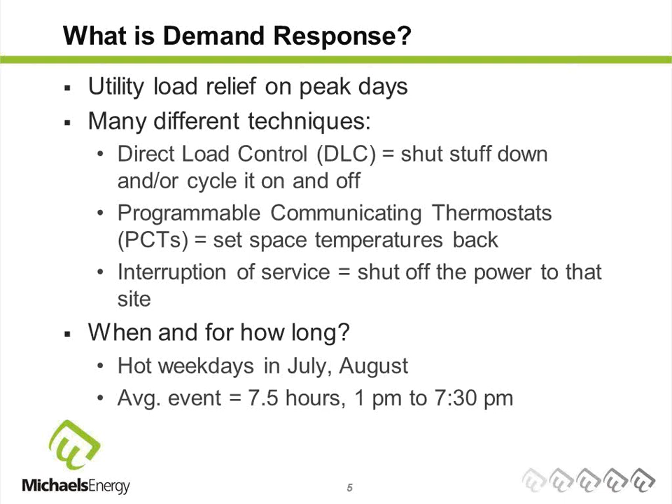So when and for how long? Most commonly it's hot weekdays in summertime, July, August, when cooling loads are at their highest. And we found from our research that the average demand response event lasts about 7.5 hours, and a rough time frame is 1 p.m. to 7:30 p.m. Late afternoon to early evening hours are the most common.

So that's another definition of snapback. But none of these are the ones, of course, we're talking about today. We're more interested in energy than hats. And so we're talking about after a demand response event, if you change the set points in the building, they all come back to their normal set points.

Air conditioning comes back on 100% power to try to catch up now that it's had all that time where it's not been able to maintain space temperature. And then all the interruptions cease and things resume to normal operation. So immediately after the demand response event, your demand jumps way up. And it jumps up higher than what it would have been had you not done the demand response at all. So that's what snapback is.

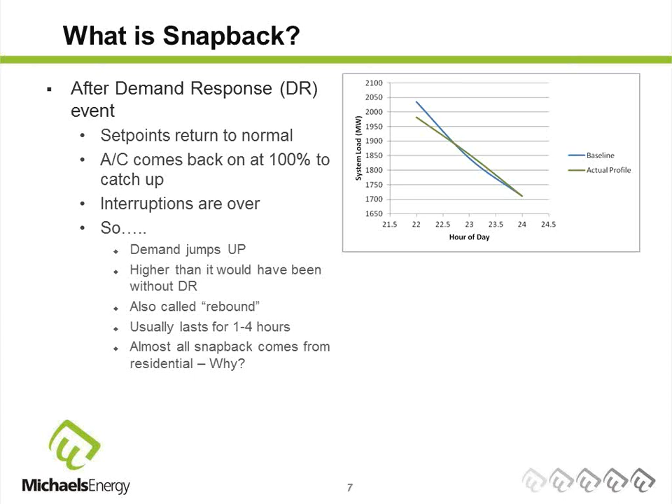First, before we get to that graph, this one here shows the system load after an event. So this is from our data showing the last few hours of the day, hour 22 through 24. And the blue line is what it would have been had you not done demand response, and the green line is what it actually was with demand response. And as you can see, it's kind of hard to see, but the green line does pass over the blue line, and that region right there is the snapback.

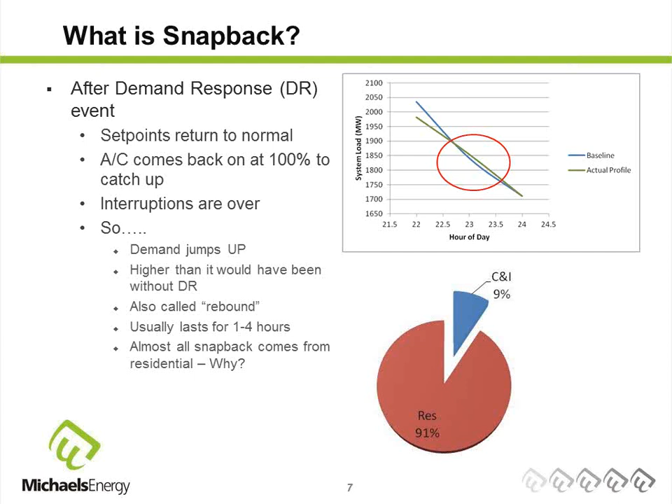And then here's the graph showing the breakdown between residential and commercial, industrial. Obviously, most of the snapback, 91%, comes from residential. And the question, of course, is why does that happen? In order to address that question, we wanted to look at the residential sector a little bit more carefully. And we'll get into the details of how we did that, but first a little bit about what they do at the residential side for demand response.

One way that's common is to use air conditioner electric heat cycling. That's where you do 15 minutes on, 15 minutes off, typically, during an event. Then you have domestic hot water curtailment. That's where you just simply turn off somebody's water heater during an event and use thermal storage built up in the water tank to allow the customer to continue to have hot water while saving the energy of the heater.

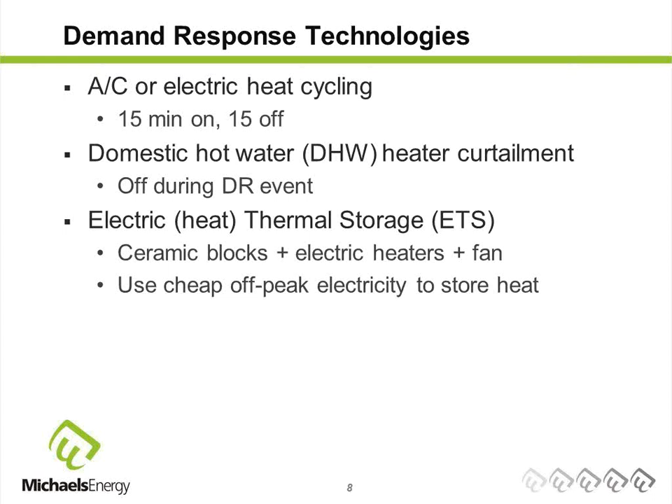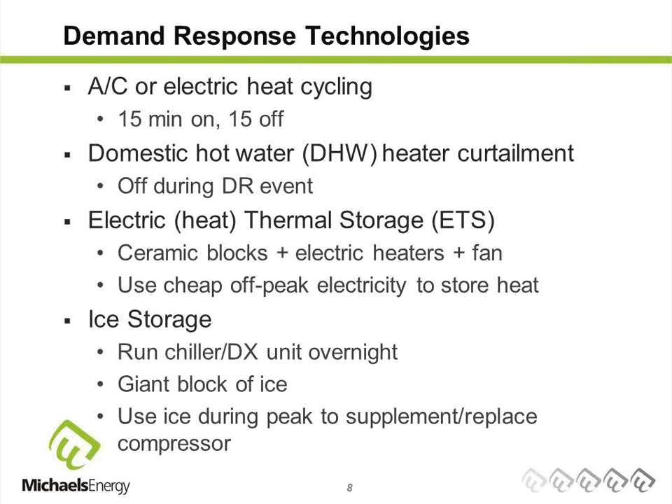Then you have electric thermal storage using ceramic blocks with electric heaters in them and fans. This stores up off-peak electricity to use as heat the next day during the peak. And then ice storage, where you run your chiller or your direct expansion unit overnight and store up a giant block of ice, basically. And then during the day, you run refrigerant through that ice block and use that to supplement or replace the compressor during those peak hours.

So these different things, demand, energy, snapback, demand response, how do they relate to each other? And how can we quantify that? Well, first of all, demand response saves demand. That's its primary purpose. And the large utility that we studied in 2007 saved 454 megawatts of peak power by doing demand response.

It also reduces the utility operating costs because of the high cost of electricity on peak and the high cost of generating electricity on peak. You save money for the utility. And going along with that, of course, the generating efficiency increases as you reduce your peak generator operation, since they're the lowest efficiency generally. And it causes snapback in residential customers primarily.

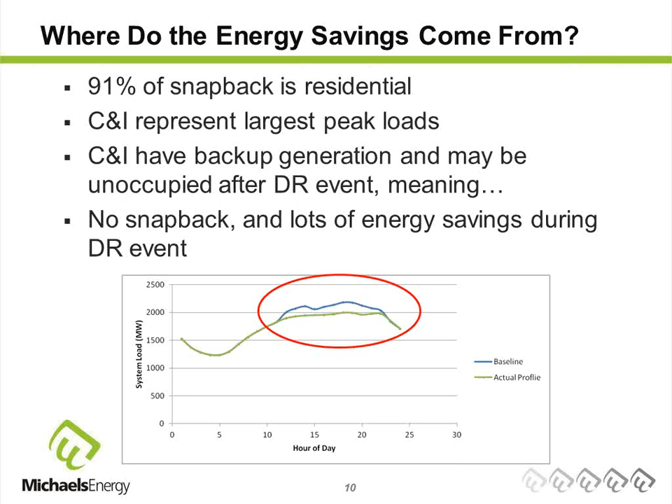And there's an example showing a typical demand response day for one utility, baseline load, what it would have been without it. The green is the actual with demand response, and all that area in between the two curves, that's savings. And actually, you can't see it because it's really small, and I zoomed in on the slide earlier, but the snapback shows up just a little bit at the very tail end of that.

So before we started our own research, we looked at what was out there as far as quantifying snapback and demand response energy savings. So there's a few studies out there. Some of them did better jobs than others of looking at snapback and quantifying.

And so, California did a few studies, but I was underwhelmed with the results, particularly because they had graphs that would show snapback in their appendix, but they didn't address those results anywhere in the report. So they didn't seem to think snapback and the energy impacts were important to them. They were more concerned with demand reduction, which is certainly understandable.

But in these studies, a few of them quantified snapback, but generally that was not the focus of the research, and it certainly seems like there was a lack of research out there to compare to. Certainly in some of the other technologies that we will look at here later, hardly anyone has looked into it. So these are the largest studies that we compared to.

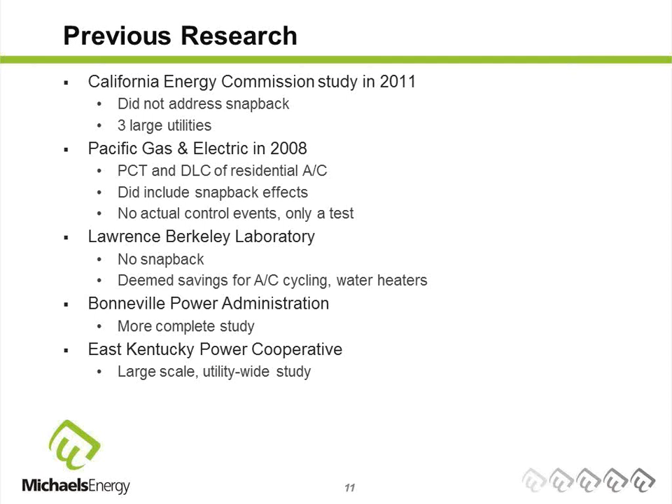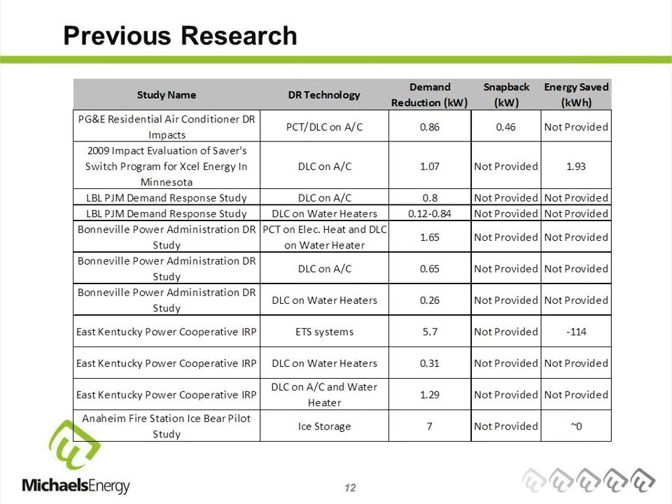One study did electric thermal storage, and most of them did not look at snapback, quantify it at least, as you can see in this column. And most of them didn't look at energy savings. There's only a couple that actually did quantify the energy savings of these different demand response technologies. So there's clearly some information lacking, and we wanted to try to fill the gap.

And so for the DER study we did calculate the snapback and the net energy savings for demand response. We looked at two different utilities. One was a large investor-owned utility, and the other one was a generation transmission co-op. We looked at their system-wide load profiles on those demand response days, the baseline curve, which would have been what they would have done without demand response, and then the curve with demand response. And we looked at these 5 individual demand response technologies, and we wanted to analyze those each in detail at the individual home level.

So we looked at 2 different utilities, like I said. These utilities were pretty different. They had different generator mixes, different mixes of customers, residential versus C&I, different numbers of customers. So the two utilities were separated for analysis purposes. Our data had 8 demand response events from the IOU and 21 from the cooperative. Why was there such a difference?

That's a really good question. Well, one reason was they're different years, so the weather was different between the 2 years. One was 2007, one was 2011. So why didn't you use the same year? Unfortunately, that's the data we had available to us. And because we were able to keep them separate, we were looking at them as separate entities, not so much interested in comparing the two.

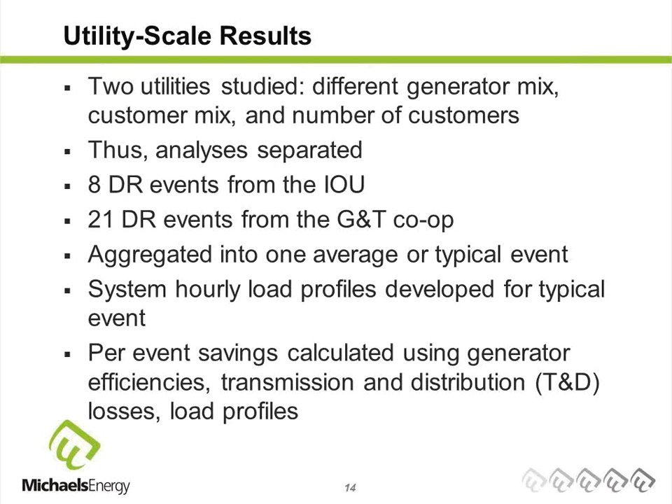The co-op was large enough that it actually still had enough suburban or city customers and industrial customers to drive that up. So we aggregated all the events from that year into one average or typical event for that year. And we developed system hourly load profiles for that typical event. And then we calculated the per event savings using the generator efficiencies, distribution losses, and load profiles for each of the utilities. And you'll see that here.

So these are our final results for our utility scale analysis for the 2 utilities we looked at. And you can see the load relief, the source savings, and then these 2 here, the 3rd and 4th rows in the table, are normalized by the megawatts of customers enrolled in that demand response program. That was in order to normalize it to make it more useful more generally. And so those are the normalized values for these 2 different utilities and the net energy saved for each. This is for that typical event.

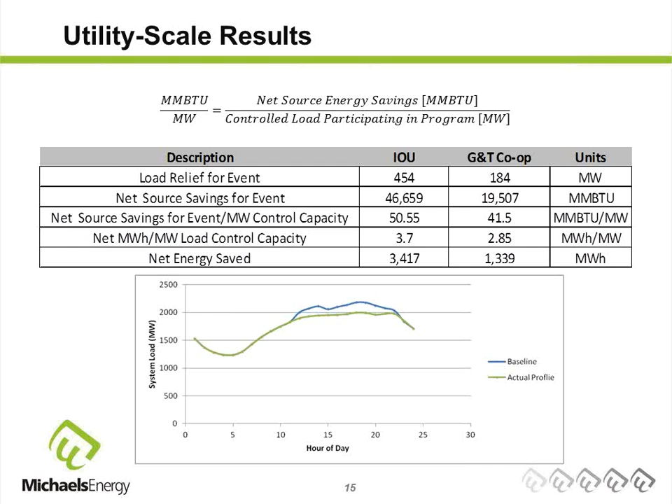So next up, I'm going to discuss a little bit how we did energy modeling to look at the energy savings at an individual home level from these different demand response technologies. How do homes and home air conditioners and home water heaters interact with demand response events? So we took a typical Minnesota house. We used census data along with energy codes to define what a typical house is. We also utilized a previous project we had done for DER on geothermal, and we utilized that same model house with just a little bit of updating.

And we used Energy Plus and BE-Opt to do the actual modeling. Energy Plus did all the energy analysis. BE-Opt is just software designed for residential modeling, and it makes inputting residential parameters and designs much easier than Energy Plus by itself. So it works with Energy Plus. And we used that to simulate demand response events on peak summer and winter days.

And we did 3 different home sizes. We were comparing the no demand response demand and energy versus demand response demand and energy the same day, the same hours. We did 3 different sizes: a small house, a median house, and I use median there because that's from the census data, what the median house for the Twin Cities metro area was, and a large house. Do you know what the definition of that was? I have it in here, I believe, coming up. Yeah.

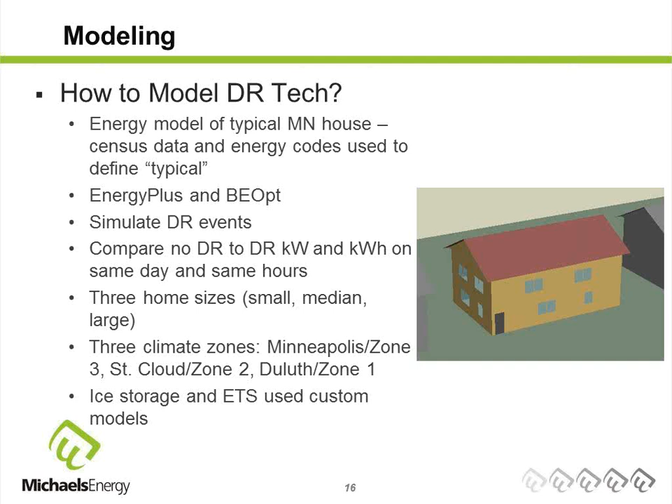And 3 climate zones. These are the 3 climate zones defined by DER for the state. So we have Minneapolis representing Zone 3, St. Cloud for Zone 2, and Duluth for Zone 1. And then we had to develop custom models for the ice storage and electric thermal storage because those could not be incorporated in any of the energy simulation models. And so we developed spreadsheet models to analyze those.

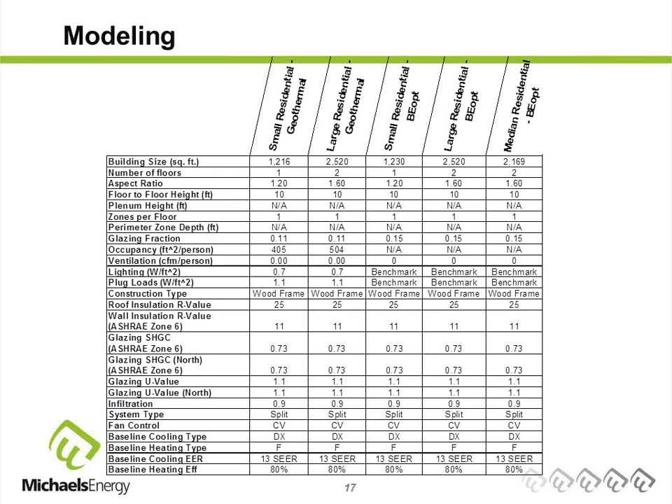This is, once again, a really big table, but if you want to read the report, you can look at these in more detail. These are from the old geothermal study, the first 2 columns. And we adapted the large and small house from those to use for this project, and then we added the median house over here. So there's your 2169 square feet, 2-story, and other things like that. So that's where we got all the parameters, the windows, the insulation, etc., for the energy modeling.

And these are the results from that research. As you can see, we get savings for everything. The only thing, thermal storage does not really produce energy savings, because with electric heating, whether you do it off peak or on peak, or when it's cold or warm, the efficiency does not change. Unlike cooling, where if you do it at night when it's cooler to store up, like with ice storage, the efficiency of the compressor is higher at night. That is not true with electric thermal storage, so you don't get any energy savings, but you do still get that peak demand savings. You're just trading off electric heat one time of day for another. But these other ones do.

It varies in degrees. This is for the Twin Cities, with that weather data. And I circled these first two here because I wanted to characterize the snapback, obviously. So I included that here, but this is the net. So this includes that loss. You lose some of the energy you save during the demand response event with the snapback after the event. So this takes that into account with the net values here. And this is per event, per house.

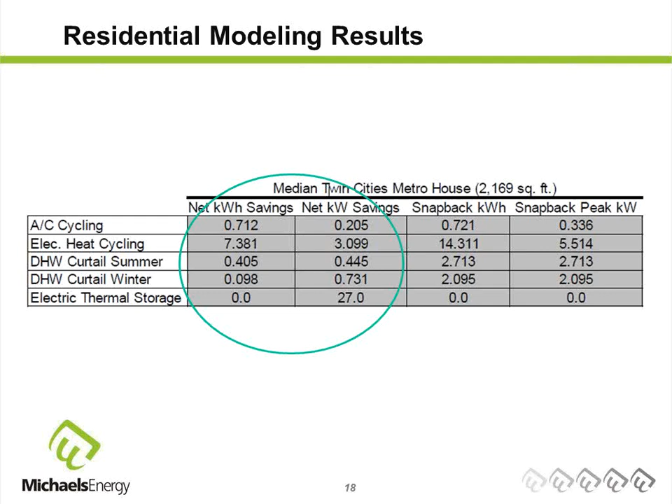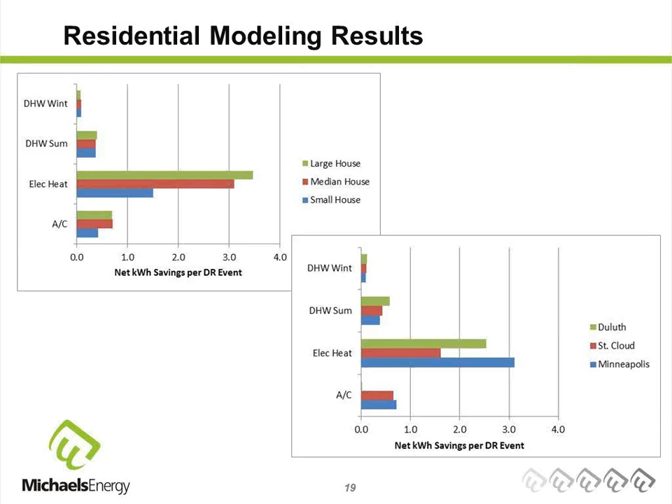So let's see. Next, I want to talk about the ice storage. The way these work, we looked at what are called Ice Bear units. This company called Ice Energy makes these. And they come in 5-ton increments, and you can attach them to an existing direct expansion rooftop unit. And basically it has its own compressor and its own storage compartment for ice. And then it has refrigerant lines that connect to an evaporator that you install into the existing rooftop unit.

And then it allows you to exchange refrigerant between the ice storage and your main rooftop unit, and allows you to get that cooling by storing it up at night, and then during the peak afternoon, the ice storage unit kicks in and does all the cooling for you and relieves the strain on your rooftop unit.

And so to model this, we wanted to look at a variety of typical small commercial buildings. So we looked at everything 2,000 to 8,000 square feet. We sized the units accordingly in 5-ton increments because that's the way these units are manufactured. So we did 5-ton, 10-ton, and 20-ton cooling loads. And we did the different schedules because we wanted to see the effect that building schedule would have with setback and everything. So we did 4 different building schedules for those sizes of building to represent 4 different uses: retail, a 24/7 operation, those sorts of things.

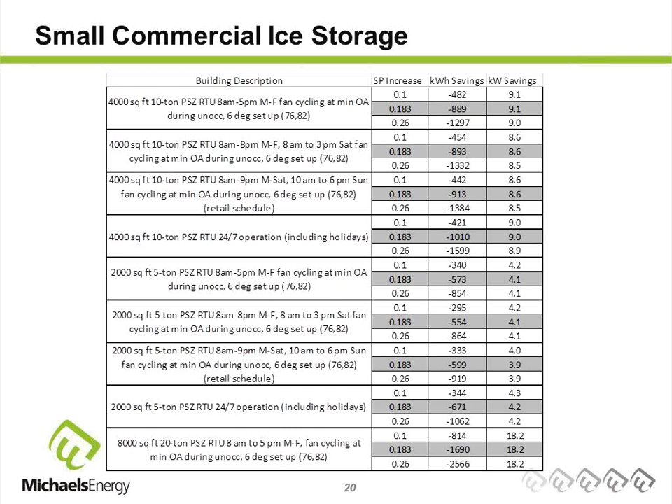And so here's the trends we ended up with. After running all those simulations, we found that the peak demand savings varies linearly very well with the cooling capacity in tons. And so we were able to develop a nice little profile for this range of cooling from 5 to 20 anyway. That worked out really well. The peak demand savings correlated well.

And then when we looked at the energy savings, which is actually an energy penalty because it increases the energy use overall, we had to do a three-dimensional fit because there were two parameters that it ended up being dependent on. It was dependent on the tons and the hours of operation schedule, which makes sense, that the energy use should be dependent on both those factors. And so we did a three-dimensional fit for that to develop an equation that would relate those two parameters to the energy savings.

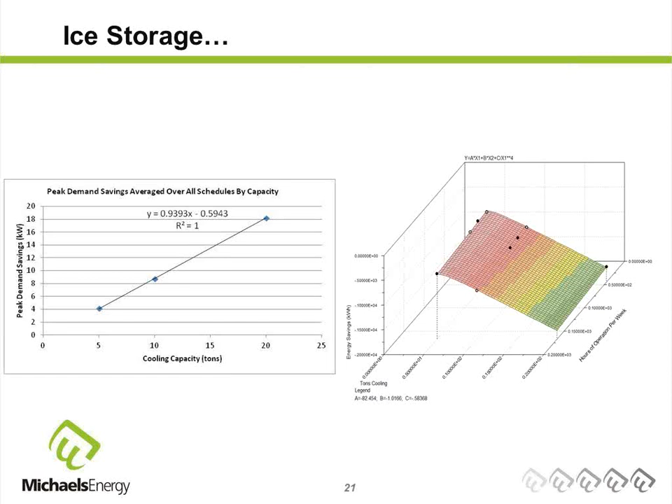And this is how we actually went about doing it. We used eQuest software to develop our cooling loads. So that's how we determined what the cooling loads in the building were for every hour of the year. Then we used the manufacturer data provided by Ice Energy to get the ice charge times, how long it takes to store up the block of ice that you need to meet that day's loads during that peak time of day. And then we used Ice Energy's compressor curves to get the compressor demand, and we calculated the charge hours per day, and then developed the correlations that I discussed.

And as I said before, the energy increases because of the fan energy penalty. So these are the two equations that we developed based on this research. And as you can see, obviously, because it's a three-dimensional fit, two parameters, it's a little more complicated of a formula, but nonetheless, you get your energy penalty from that formula by inputting your hours of operation per week and then your tonnage.

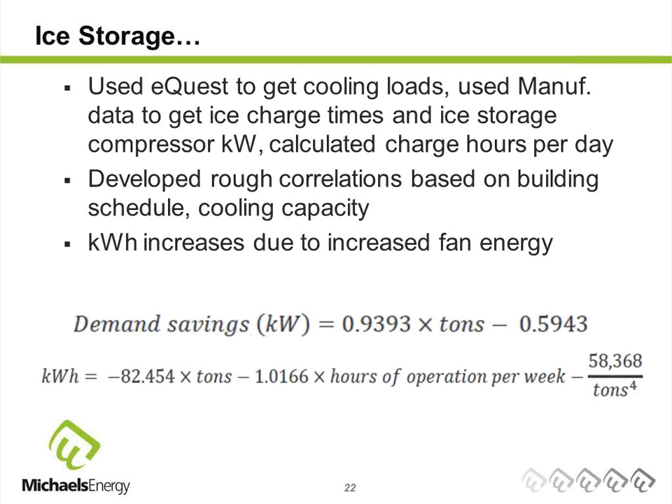This is a graph demonstrating what a typical day looks like on a typical peak day for an ice storage unit, for one of these Ice Bear units. So this yellow line is what a typical rooftop unit does, just your standard rooftop unit. Before the building becomes occupied at 6 a.m. it starts to cool the building down, so it has to turn on, and it cools it and peaks demand at 2 p.m. when it's hot outside, and then it drops its demand until it turns off when the building is unoccupied.

What happens when you install, the purple line here, is the ice storage system. What happens here is the ice storage system is charging from about 1 a.m. until about 6. So it's charging, instead of using 0, obviously you're using about 6.5 kilowatts while it's charging up the ice. And then for 1 hour here, both the rooftop unit's compressor and the compressor in the ice storage unit are both running. So demand spikes here at 6 a.m.

And then once the ice storage unit is all charged up, it's got all the ice it'll need for the day, it turns off, and now your rooftop unit takes over for the next few hours until you get to the peak time. And you can set that. In this case, peak starts at noon. So at noon, the rooftop unit shuts off, and instead you start using the ice storage unit. And the ice storage unit, to discharge that block of ice, all it needs is a pump and a fan. So it's only using about 300 watts of power during peak demand time. So you see that big reduction there, savings from using ice storage.

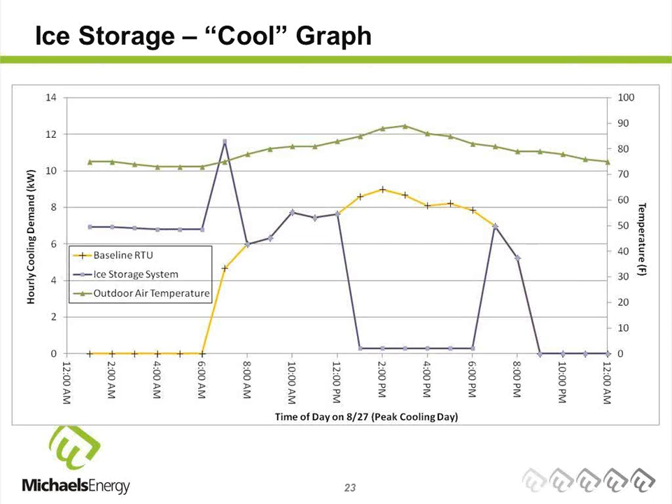So in order to really help with that, we developed a calculator. It's an Excel spreadsheet, hopefully easy to use, and has all the instructions laid out. It walks the user through different levels of rigor or detail depending on the information that you have available at your utility. It's designed to help utilities identify the best system level demand response energy and demand savings that fits their utility best. And so we're trying to get the most accurate number we can by having these different levels of detail. So I'm going to try now to launch this. I want to demonstrate the use of this tool briefly.

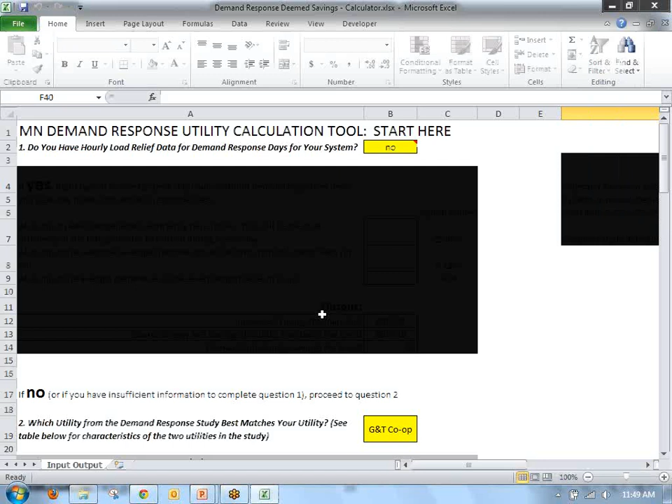So it starts here with question 1. This is asking if you have hourly load relief data. So that's the type of data that we used in our study that we got from those two utilities, where they had a baseline profile, which they usually develop using some sort of regression model, to determine what their load would have been if they hadn't done demand response, and then the actual load profile for that day with the demand response. So if you have that hourly data, that's great, you could just say yes here, and then these blue arrows are pointing you to where you put that data in.

If you say no, so maybe smaller utilities, municipal utilities may not have that level of information, then you can move on to step 2, and you can look at these two utilities, look at some information, and determine which one better fits you based on that information. Which of the two utilities used in the study best match yours?

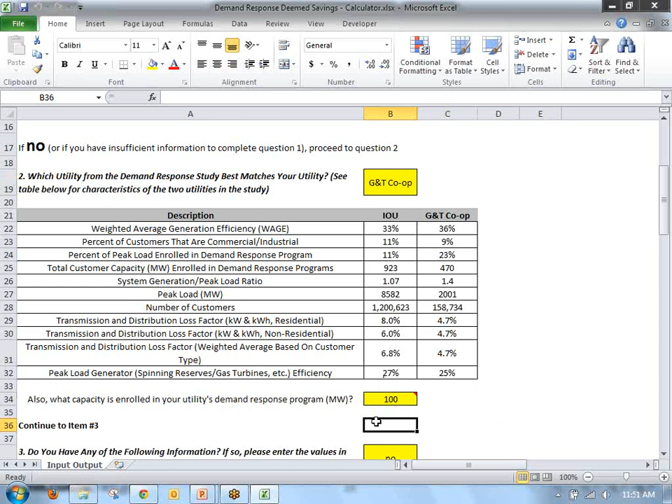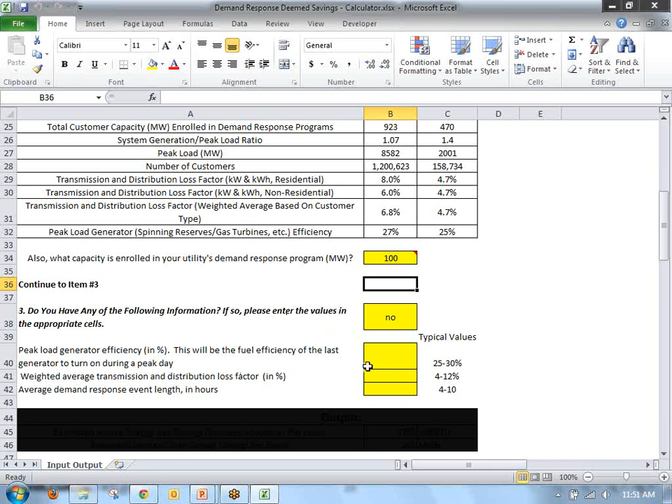And then down here you also need to add in what your capacity is, because these are normalized values. You need to know how many megawatts are enrolled in the program. And then you can scroll down here again, and this is to further hone those numbers. If you have this information, then this really helps improve the accuracy. If you have your peak load generator efficiencies, your weighted average loss factor, and your average demand response event length, you could type those in. That will help increase the accuracy.

And then whatever your results are show up down here. You get your source savings and your demand side savings per event for your specific utility. So hopefully that's a useful tool to use and help to make these results more applicable.

I want to just briefly touch on some of the limitations of this research. The residential results relied on energy simulations, so we didn't have field data on individual homes to validate with. The ice storage modeling results are limited to that range because statistically we can't go beyond that range reasonably, because that was the range that the modeling was done on, the 5 to 20 ton range. But we think that covers a pretty large range of small commercial buildings.

Heating and cooling results are climate dependent. These are all obviously done in Minnesota. California or someplace else probably wouldn't be able to use very much, particularly the residential results, because those were very dependent on weather.

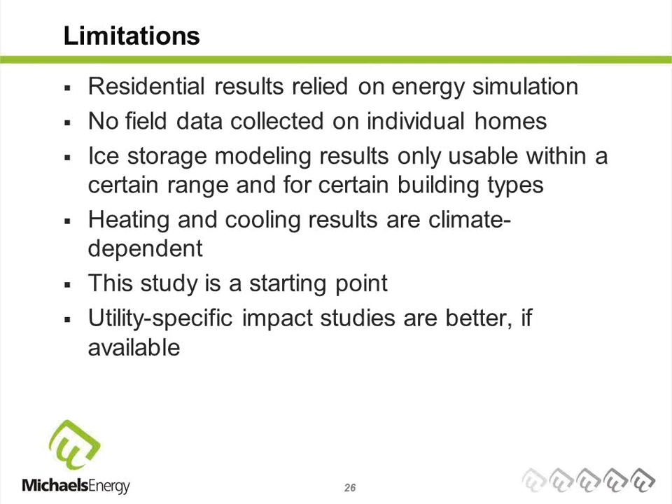The study is intended to be a starting point for snapback research. There's not a lot out there, like I said, especially about quantifying it and coming up with actual numbers people can use. So this was an attempt to start doing that and get some numbers people could actually start using and analyzing their own systems with. And obviously a specific impact study for your utility is going to be better, when you can actually do meter data and things like that. But in lieu of that, this is something that can be used.

So I wanted to end on this with the potential for demand response. It does save energy as well as demand. I think that sometimes gets lost. So I want to make that clear that demand response definitely has energy savings potential. There's a lot of potential out there that is being untapped.

So I think there's a lot of potential for ice storage there, and also snapback is almost all residential. So that's where you should expect to see snapback occurring, but even on a residential level, it's still dwarfed by the energy savings in most cases. So even though there is that snapback present, you still end up with net energy savings for the event. And there's cost, demand, and energy savings potential for both utilities and customers with all these different demand response technologies. It's definitely a valid investment to look into.